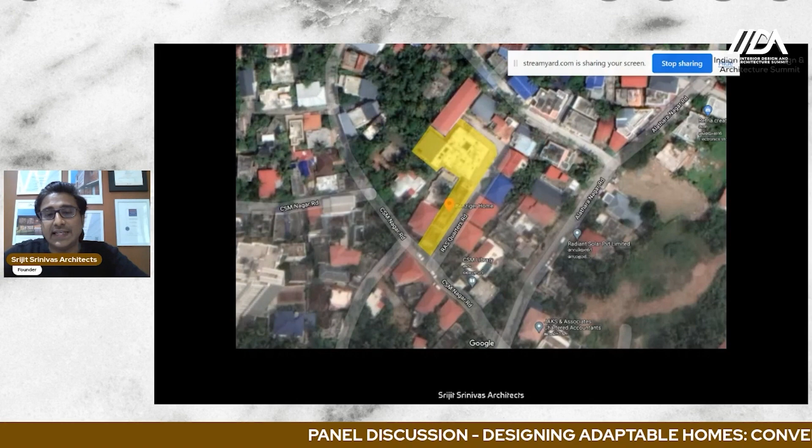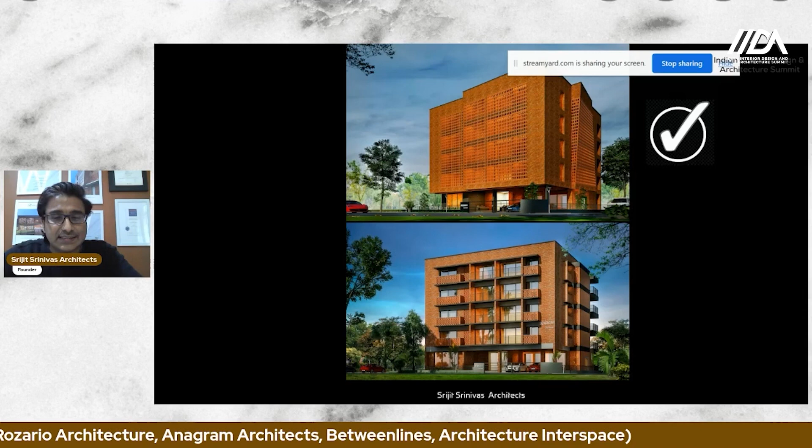This is the tail-like structure of the plot, and in total, the yellow thing you see there - 30 cents of land. What I would like to say here is, you are seeing two 3D views, one on the bottom and one on the top. The one at the bottom was the first one, which we did after having inputs from everyone in the discussions, like balconies. For me, it looked like a normal structure.

What I have felt is when you involve a lot of people in the discussions, you will get a practical solution maybe, but then something like the wow factor and something special of the building you might miss.

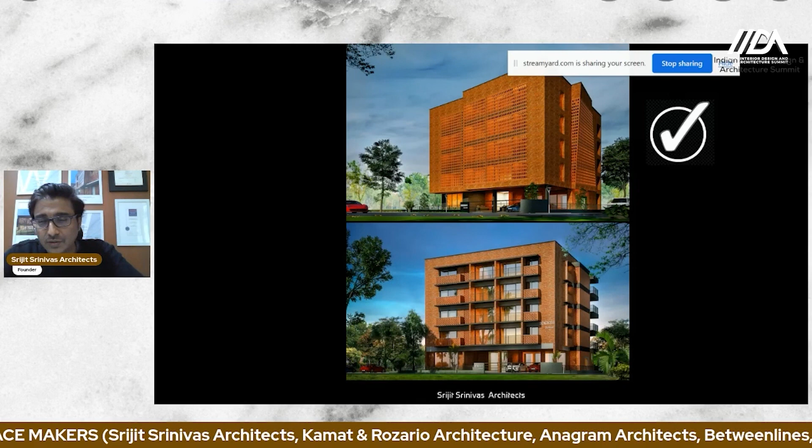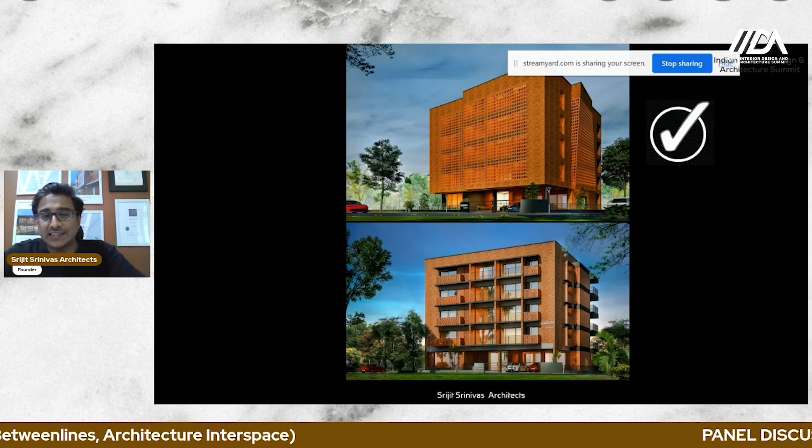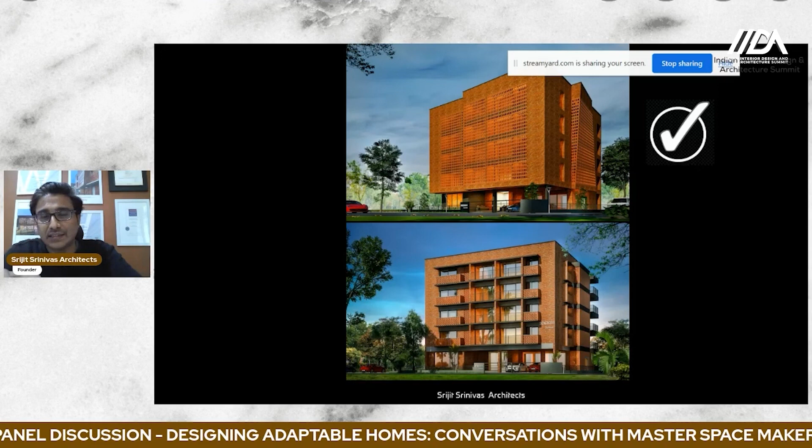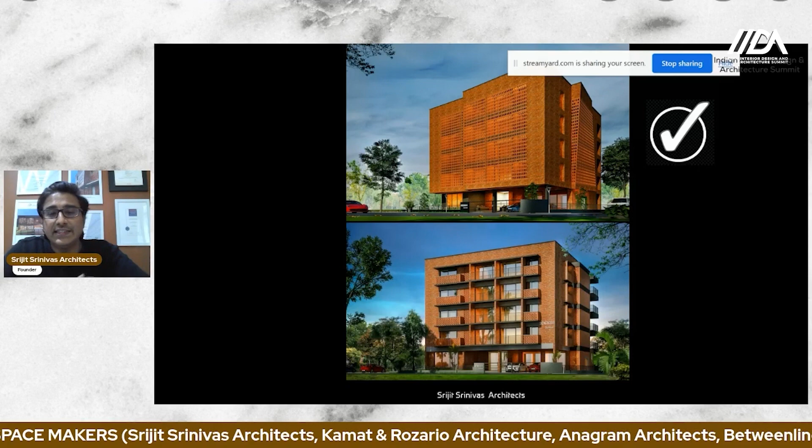So in this particular project, at the time of the foundation stone laying, what we did was we displayed the bottom portion 3D view as the poster, so everyone was happy. But after that, we got the committee together, discussed with everyone, told them the pros and cons of having privacy for the patients, and we actually even discussed with the patients. So the 3D you see on the top was approved, and we went with that. This was actually an award-winning project also for us.

Just showing you a few pictures very quickly. These are...

So we created such spaces, and these bricks, and we created a lot of open spaces in this building, and chances for people to interact.

And just to bring something surprising, this is a double slant wall. The previous photo you saw was the recreation room, and this is just the outside of the recreation room. You can see that the wall is slanting as it goes up - that's a double slanting wall.

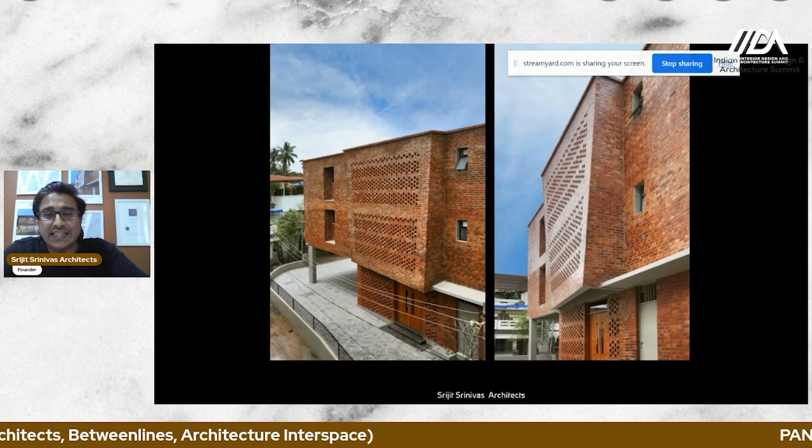Again, the patient's room - what you see there is not glass, it is a mesh. These louvers gave privacy for the patients. As you know, cancer patients, many of them won't have hair on the head, so they don't like to be seen by outsiders, and this is a very crowded locality also. So we were able to give them their peace of mind and comfort in their rooms.

And this is just the exterior, how we treated the exterior as a simple platonic form. Actually, if you look carefully, this building lacks some finishes, because this 16,500 square feet building was actually done in just 7 months' time.

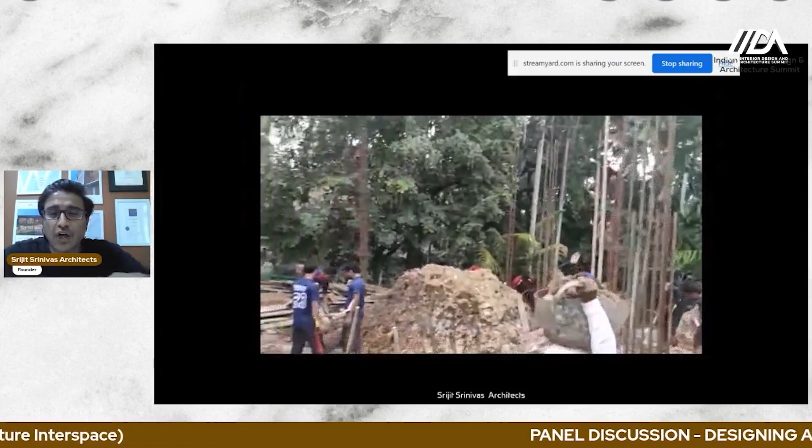This is how they were all involved - the clients, these are from the client side. You can see that they were all involved in this construction. The person you see there is the owner. So it was a teamwork.

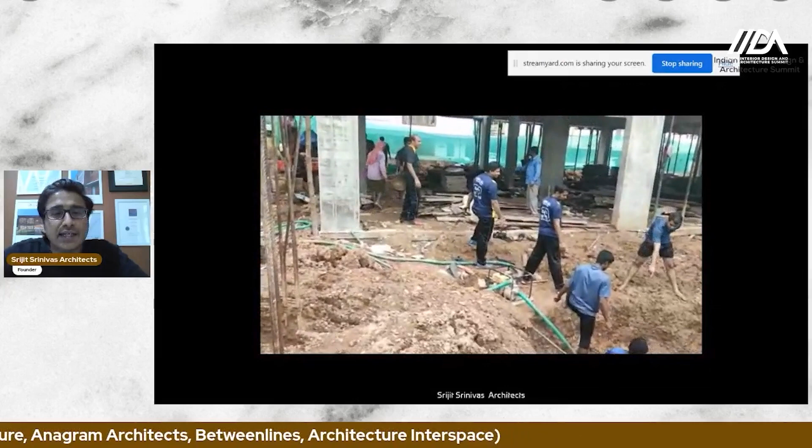Since we had to do this very quickly, they were all involved in this physically. Even due to floods, rain, and everything, it was a very tough condition on the site, and we really wanted to involve everyone - it was a great thing happening inside.